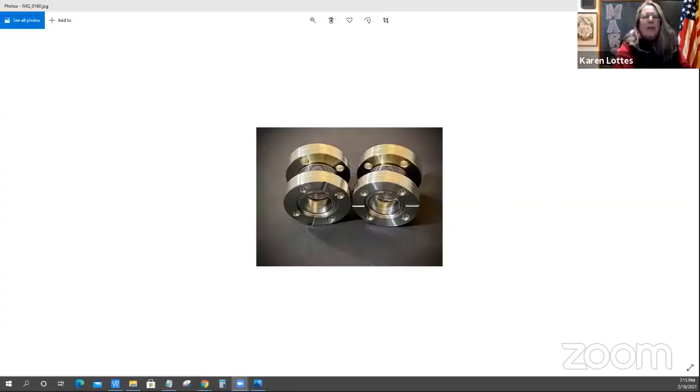Why don't we pull up those pictures that might be interesting for people to see? Okay, all right. Hopefully, there we go. Okay, that's a bellows. That bellows is 6 thousandths thick. There's some flexibility in those, and I welded that to those flanges. That's for the University of Maryland Gravity Project.

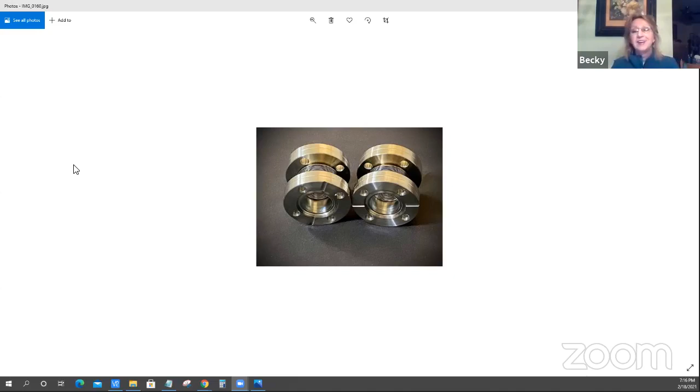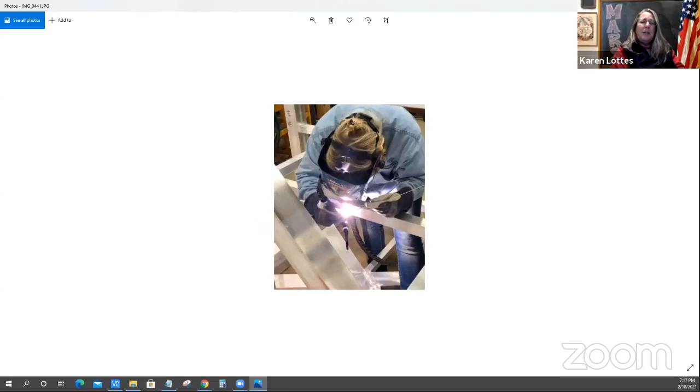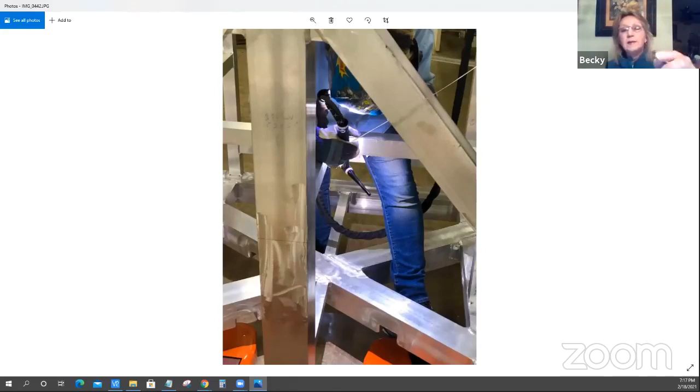This is aluminum, the same thing. I'm welding on that. That's me. And see, I'm holding the TIG rod, the filler rod, which is aluminum, in one hand as I'm welding with the other hand. So the TIG rod, is that the thin line that I see in the photo? Yes, that's the filler material. There's different alloys that you want to use for different things. So that was welding in there.

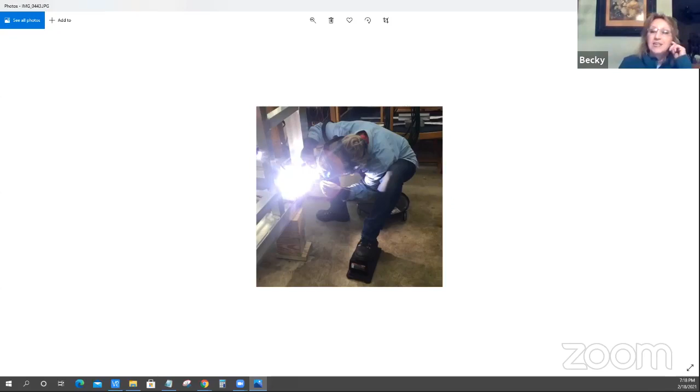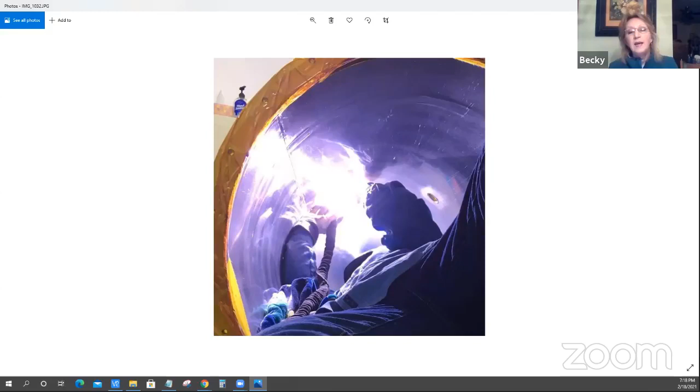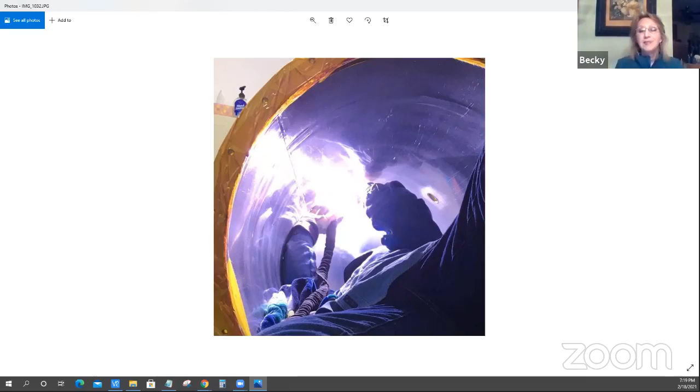That was an aluminum cryogen vessel that I was welding some ports into in the bottom of that vessel. You can see one I had already done on the right behind my elbow, and I was welding another one, and my feet were sticking out, and I was operating the rheostat foot pedal with my foot while welding in this closed vessel. You have to be careful and do it a little bit at a time so you don't run out of air, of course. I guess that was for NASA, for one of the codes there.

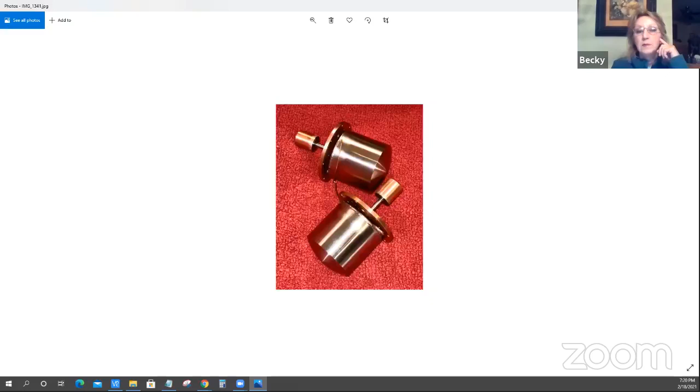Okay. It's got liquid helium in it. That's to keep it very cold. Okay. That's in my shop.

Wow, it looks really involved. Yeah.

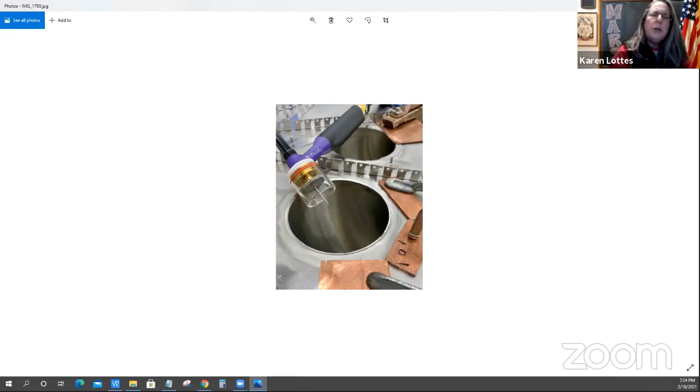In the aerospace world, can you weld dissimilar metals together? A couple of the things you've shown us have been mixed metals. Yes. Some of those were brazed, like copper to stainless. You would have to braze or solder. And are there any metals that absolutely cannot go together? Sure. Aluminum and stainless, or titanium and steel. The coefficient of expansion is different. Metallurgically, it's just too different to weld. Like I said, you can weld steel to stainless steel, but you have to use a certain type of filler. Okay.

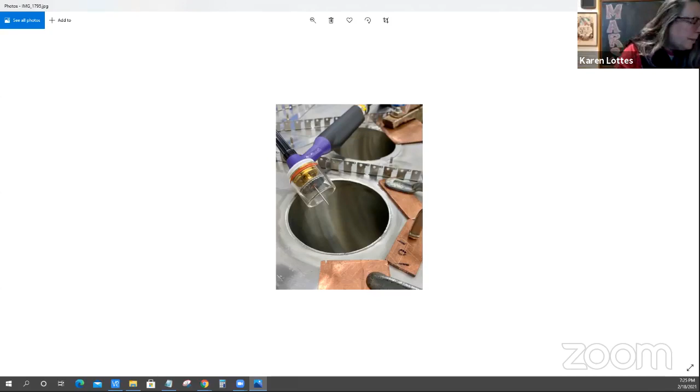So we can continue on with the slides. I don't know where we are in them.

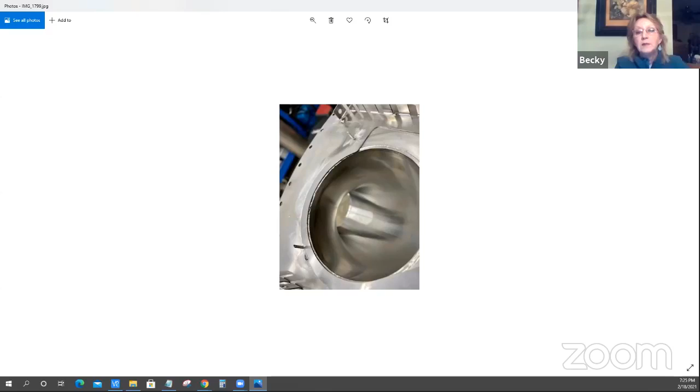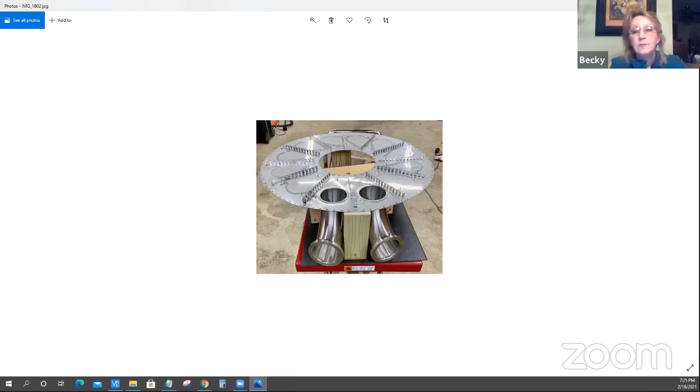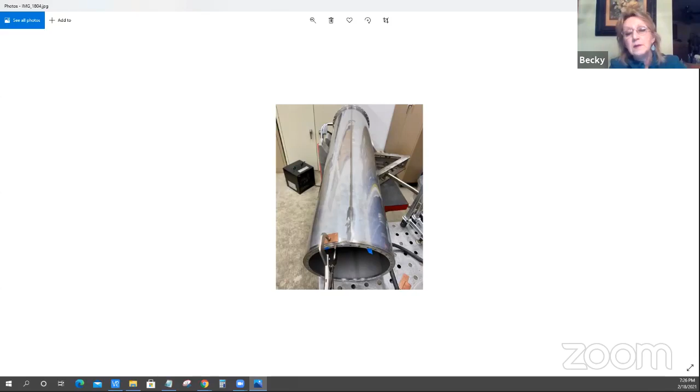Well, that's that same one after I finished that joint. There it is, the top of it there. So this is a cryogenic vessel flange. It's upside down there. The top of the flange, and then they will draw a vacuum through those flanges. It's pretty awesome looking, actually. That is a cryogenic vessel that I was making for NASA, stainless steel. Okay.

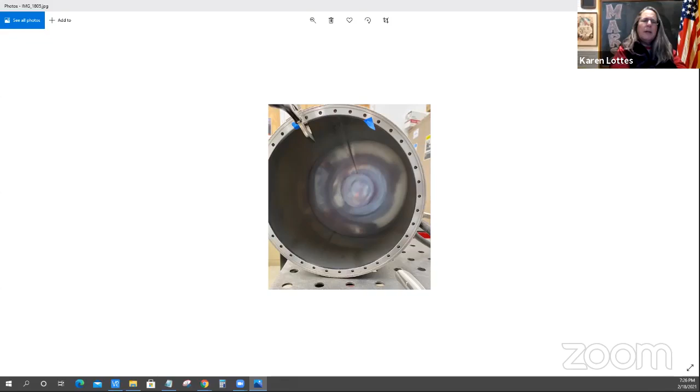So that is stainless steel. I was doing that for a group at the University of Maryland. That was thin wall stainless steel tubing welded to a fitting, and then it was welded to that oblong flange over there.

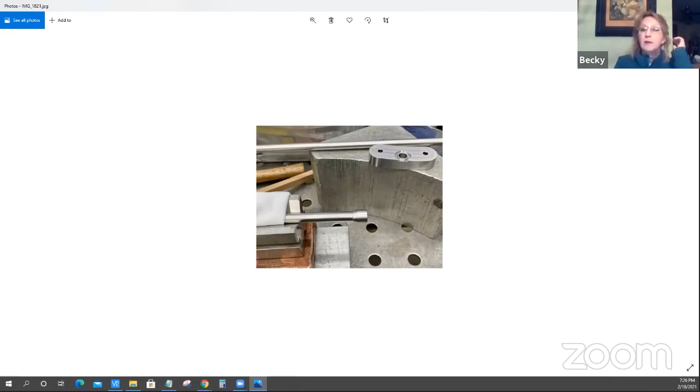There's the weld, and there's the tubing coming out the back end. You can see the tungsten to the right, where I have a Pyrex cup on my torch. That's a tungsten electrode where the arc is initiated onto the metal. And then of course you've got a ground clamp, so that's what's making the connection for the electric arc to go through from the tungsten electrode, through the material, onto the table and the ground clamp.

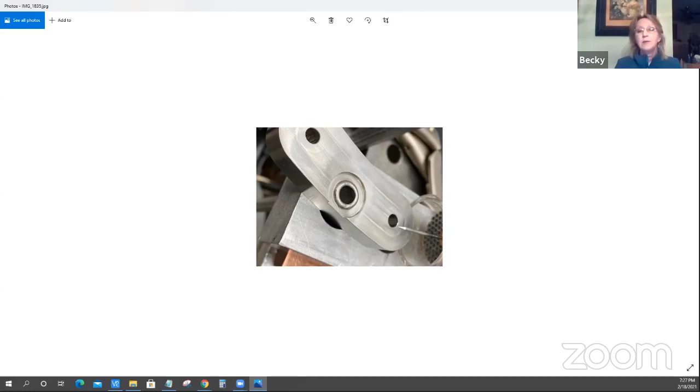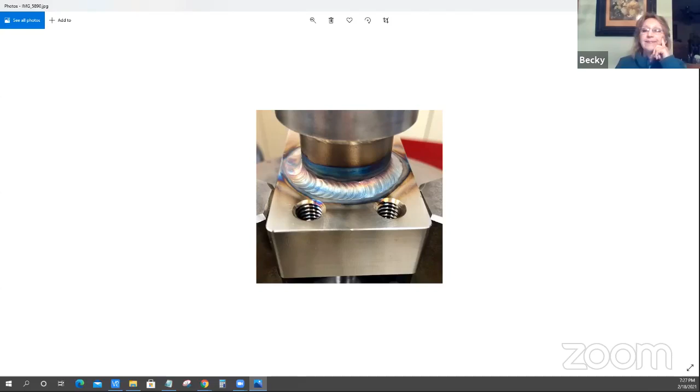That's a stainless steel part that I had just welded. It's oxidized and I had not cleaned it up yet. I just thought it was pretty. That was for someone at NASA, and I can't remember who.

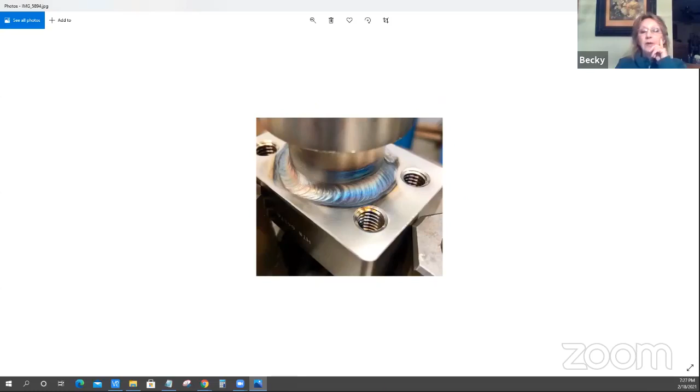You can't tell, but in the back of those are glass. That is a glass to stainless transition. I did not do that, a glass blower did. So these are bellows, six-thou wall bellows that I had to weld to a tube, to a fitting. And that's a VCR vacuum fitting.

I have this same job every couple months for this guy who has Opthos Instruments up in Urbana.

You created the metal piece and then the glass blower put the glass on it? Yes, yes. Well, the bellows is made at a scientific factory, they make bellows, and then I weld the bellows to the fitting, the Swagelok fitting, and the glass blower has already done that housekeeper seal to the glass to the stainless steel.

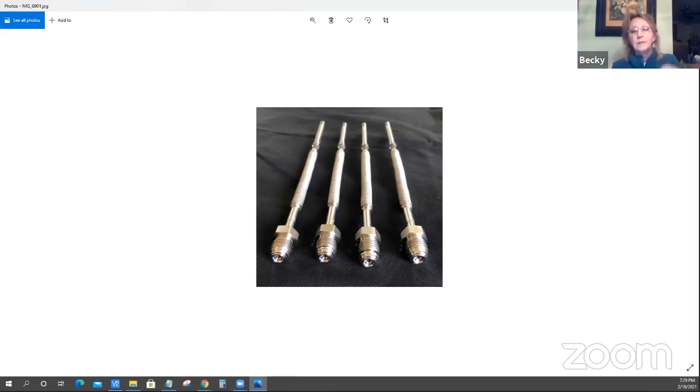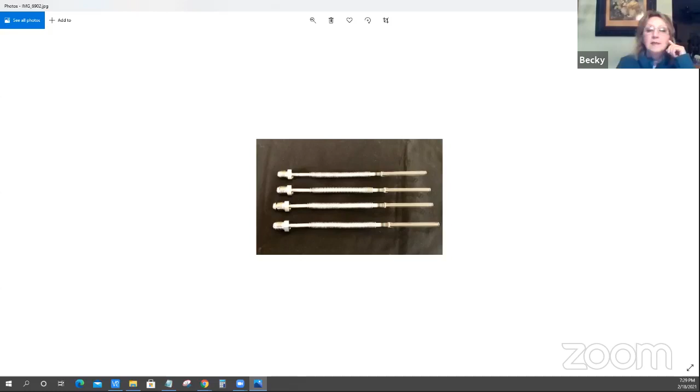Yeah, that's the same, you can't see the glass. It doesn't look like glass in that picture. No, it looks all like metal. It's funny. Okay, so this is a vessel that I was modifying for another company up in Gaithersburg, zeroK NanoTech. There's going to be a laser in there.

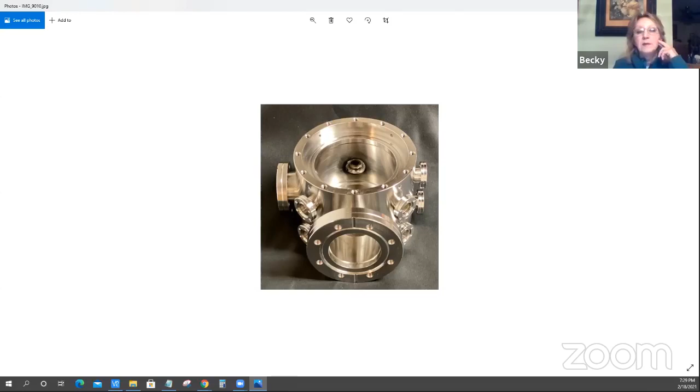There is my shop. So I was putting argon back up into this.

This is an interesting job, about a year ago, not even a year ago. So I got a call at 7:30 at night, and I answered the phone, and I don't know why, to my business, and I said, aerospace weld.

And this guy had a thick accent, and he said, can you weld stainless steel? I said, yes. And he goes, well, I need a job done tonight. And I said, tonight? I'm closed. And he said, well, no, we'll pay you. Can you come to the airport, to Dulles Airport? And he said we'll give you $500 extra just to come to the airport and pull this.

I said, what exactly is it? They said, well, it's part of the airplane, a Ukrainian jet for some Ukrainian airplane that was going to fly somebody from the State Department to Kiev, and they had to fly out, so we were trying to get this all set up in the middle of the night. And I said, okay, I'll meet you at my shop with the part because I can't do it at the airport. And they're like, oh, okay.

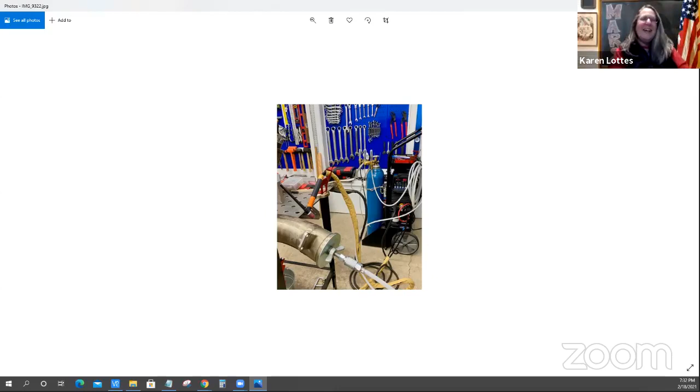Oh, and they had, I shouldn't maybe say this, they had some tanks in the airplane. Okie dokie then. There's definitely a story in there. Yeah.

Yeah, that's the part there that I fixed. It was cracked. This whole part on the left had been torn away from it, and I had to weld it back on. I hope the plane made it. I'm sure your work was fine. Yeah, that's weird, really strange.

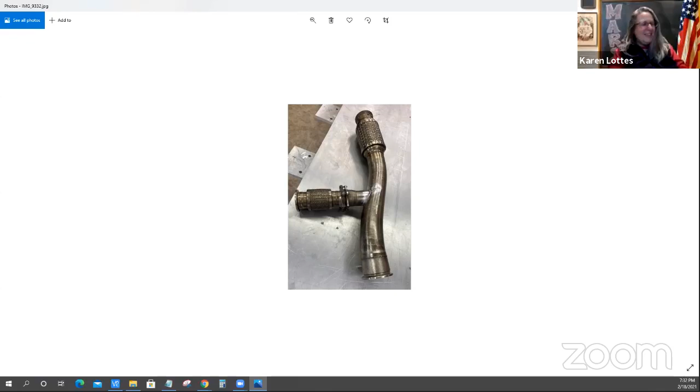Okay. I just see it a little more closely. Yeah, all right, well,

You were also telling me about some job you were working on, basically the same thing but for a comet that was passing by recently, a couple of years ago. I was doing work for three different groups at NASA, and they'd ask, I hear you're working for so-and-so, what are they doing? I'm like, I can't tell you. A couple of them were titanium, and they had different ideas of how to collect sediment off the surface of the comet. Some of them were like arrows that went down and grabbed it, then tethered back to the satellite. So I was working on three different projects for three different groups for the same thing, and I don't know who finally got the bid, but somebody did.